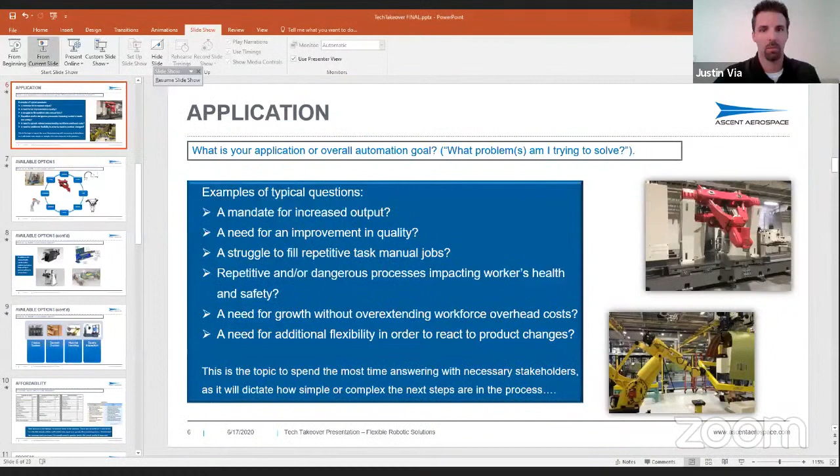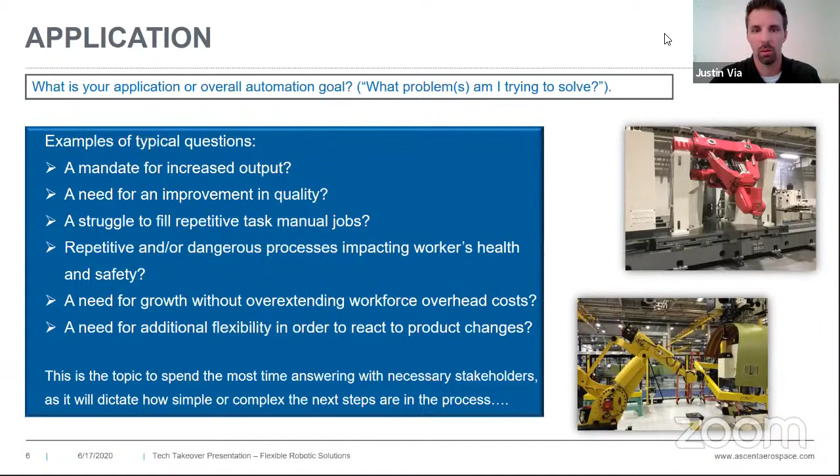How's that? Let's see here. You got it. Is it working now? Yep, it's all good now. Perfect. All right, good deal. Sorry about that.

All right, so the next part here is specific questions that you as a team might encounter related to the application and the problems. Maybe there's a mandate to increase output. There's a need for an improvement in quality. Maybe the team is struggling to find someone to fill those repetitive, manual type jobs, or

there's an element of danger in terms of process where workers' health and safety needs to be evaluated and potentially addressed. Growth without overextending the workforce, or being able to react to fast-changing products. Some level of variety along the way, and making sure that you capture all of these various answers.

And this is important because this is really the topic where, as a team, you're going to spend the majority of your time. The better you outline this and answer these questions, the easier the process is going to be to get through the next steps, because then it becomes much more direct in terms of the solution that you're trying to achieve, the budget that you're going to need to get approved, and then the implementation process for making it happen.

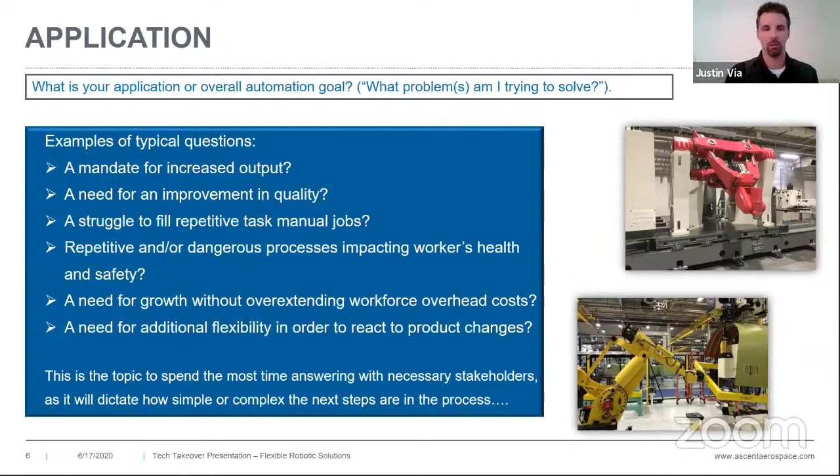And obviously, as we all know, when you're trying to sell stuff like this, the more well-rounded that case can be when you take it to the management team, the faster you will be able to get an answer to that specific budget and question, and be able to move on to the next steps.

So once you get past that gate, that gauntlet of discussion, then you get into the part of, okay, now that I know what problem or problems I'm trying to solve, what are my options? And this is the part where it starts to get a little bit overwhelming, because you're going to get hit with a lot of different options when you dive into the Google searches, and you're going to find words like industrial, SCARA, Delta, medical, service, articulated, collaborative, gantry, and you're going to say, what does all of

this mean? Well, here's a few pictures that give you a little bit of an overview of exactly what you would find as you start working your way through the solution. You have things that are gantry and industrial, which are definitely your heavy hitters, your big pieces of equipment that are kind of a move and get out of the way and let me do the job because of the environment or the processes that you're asking them to take care of.

Or you can have things along the lines of a SCARA or a Delta, or even an articulated and collaborative robot where you're actually working in close proximity to people. Maybe you have technicians around the area, and you need to make sure that the technology matches the safety for the environment and yet still gives you the solution that you're looking for.

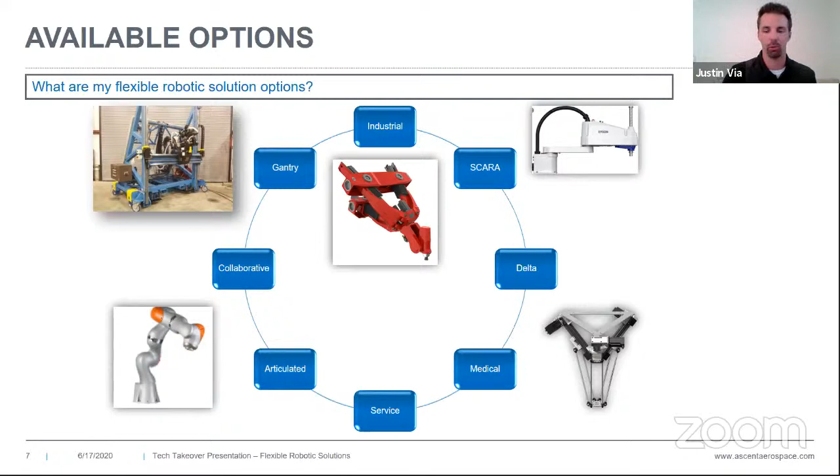But at least knowing the full range of the options allows you to investigate each one of these and really pick what matters to you most from a solution standpoint. Expanding on that a little bit further, in addition to the various options for the robotic motion, you have a variety of process options to choose from, right?

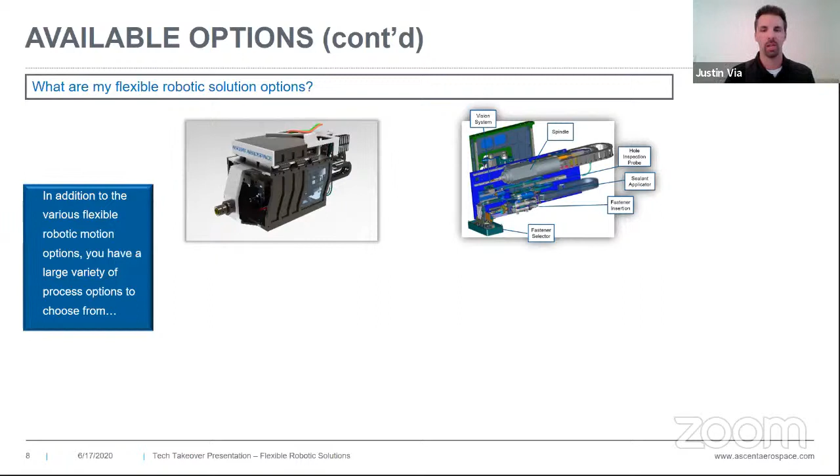Maybe you're looking for a single small compact end effector or process head that just drills holes all day long, and that's exactly what you need it to do, because that's what gives you the best quality and return on investment. Or maybe you need something that is a little more complicated and has multi-function capabilities, because you have a series of processes that you need to address, but you don't have a lot of room for multiple stations, so you try to keep it as consolidated as possible.

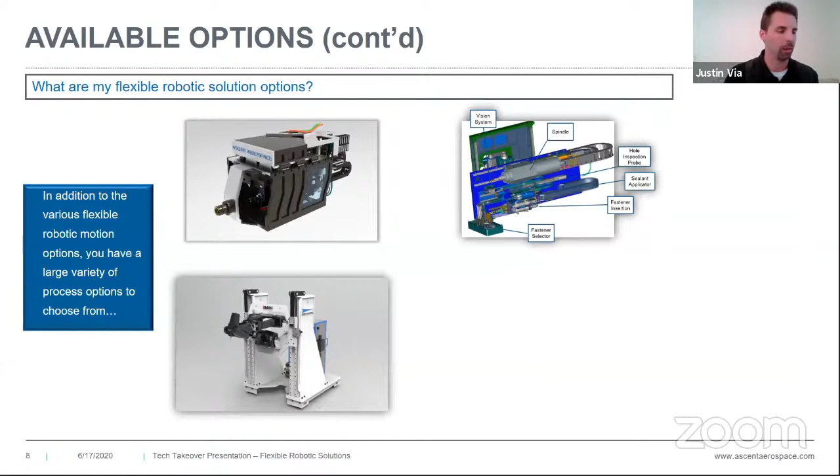Maybe you have an application that requires not only mobile flexibility to move around the different parts of the plant, but you also need a solution that can do drilling as well as machining. So like what you see here, a parallel kinematic machine on a mobile platform is best suited for your application, because it gives you some flexibility plus the necessary horsepower to address your different process needs. Or maybe you just need an entire station's worth of equipment.

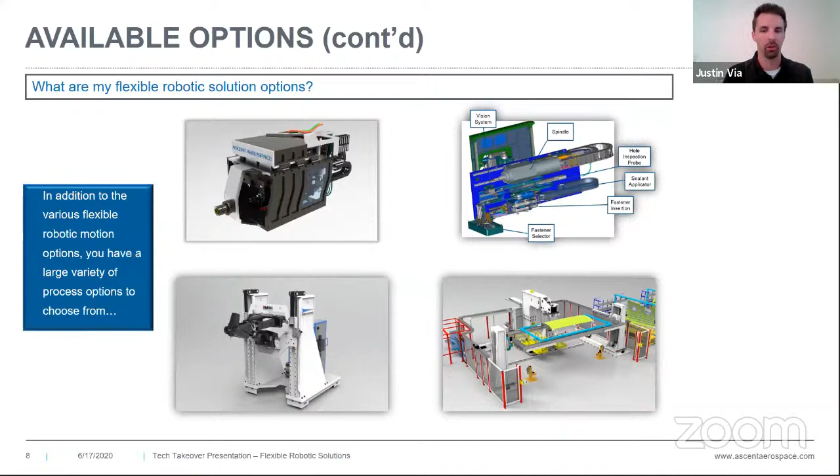You've got things that are big and heavy and hard to move, so by loading your specific parts into a station, then you let the rest of the automation do all of the moves and manipulation, as well as the processes such as drilling and fastener installation, in order to complete the work, complete the subassembly, and then allow for one overhead crane move to move the piece out of the station and move on to the next step in the overall process.

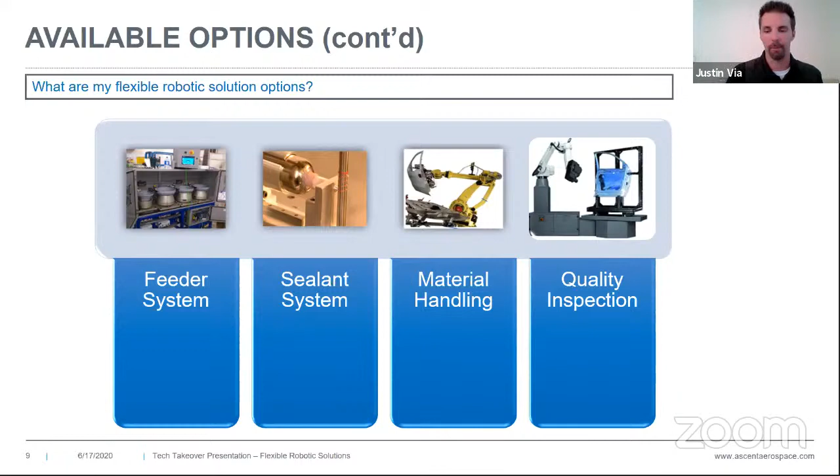Or maybe you just want to have something that is better than your everyday 9 to 5 inspection from a quality standpoint. Something that can learn as it goes, as well as improve the overall spotting of any defects, and make sure that your output to your customer is as reliable as possible, and being able to address those items ahead of delivery and having to take those items back as you go through day-to-day operations.

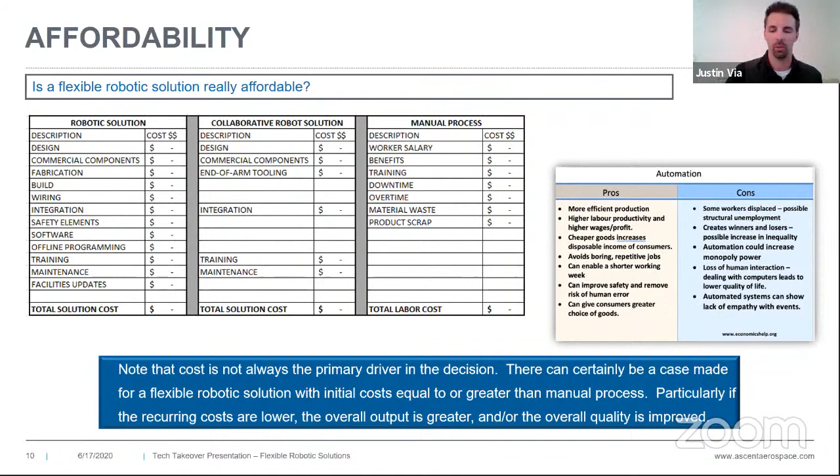But cost is not always the primary driver in a decision like this. There can be very much a case made more often than not that this type of flexible solution, even though its initial costs are equal to or greater than your manual processes, if the recurring costs generated are lower, your overall output is greater and the quality is improved, there's still a very good selling point here. And the more detail that you can provide for exactly what's all been accounted for, yes, it's affordable, yes, this feeds into the consideration for your return on investment, this gives you your best leg up when pitching these types of ideas to your management team.

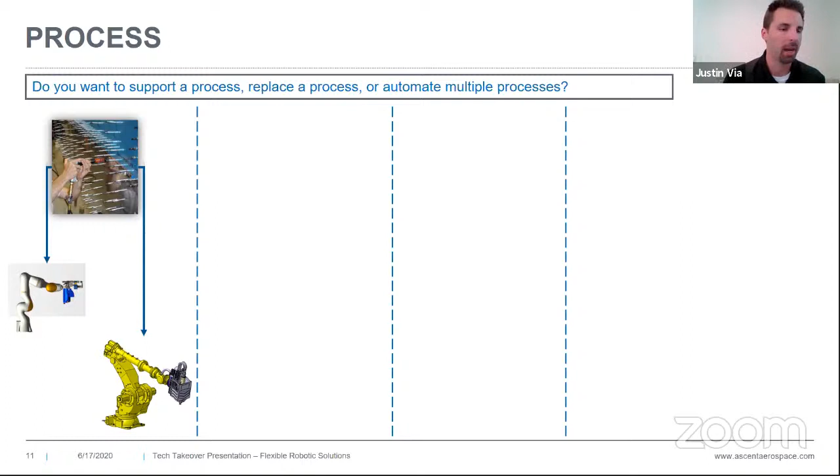So now we'll take a half step into processes here, because overall, you're not always looking for something to do everything for you in terms of your solution. Sometimes you're looking for something along these lines where you have a person that is installing rivets in the side of an airframe and does it for many hours a day, and it's a high impact. So there's a lot of difficulties and challenges that come with doing this level of repetitive work. So maybe you have a robotic solution that's a little bit smaller that can work alongside the worker, or you've got the heavy-duty robotic drilling solution that just does all of it in a single process.

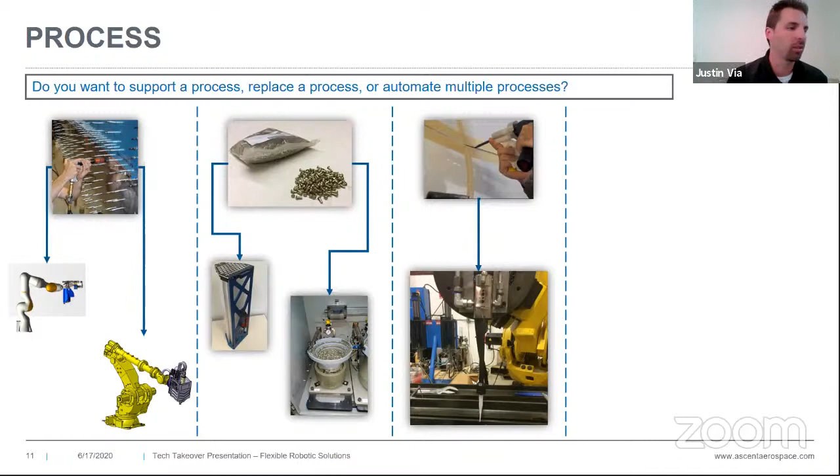Sealant is another tricky one in the industry. Doing sealant by hand is still a thing. It's still a method. Not everything from a sealant application can be automated. Challenges of the different styles of sealant, specifically aircraft sealant, have quite a few challenges from a shelf life standpoint. So there's usually a need to do it by hand. But if you could find a way to pair it with a robotic solution, then you give that chance of overall quality improvement and ideally a cycle time improvement as well, which would help your overall manufacturing process.

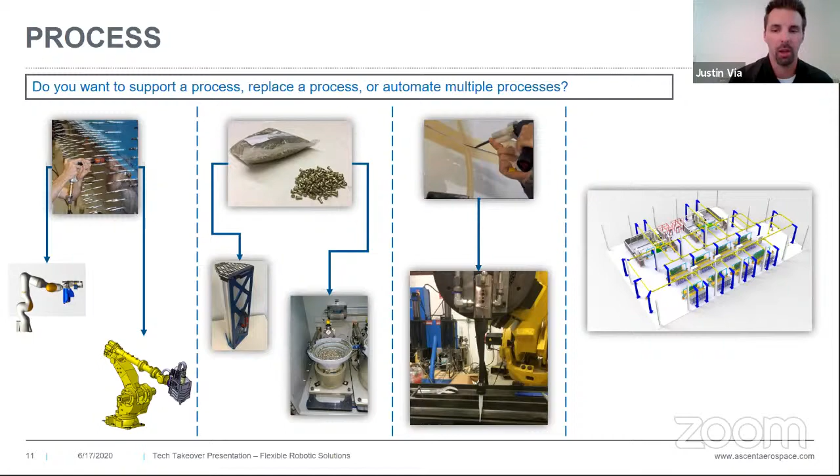And then maybe here you have multiple processes that you're trying to automate, and you got a little bit more floor space to work with. So something along these lines where you have a series of manual stations within a local overhead gantry system to bring the pre-worked panels into an automation station, let them do some of the work, and then take them to inspection stations. So you have this combination of the manual work along with the automation to support your overall manufacturing processes.

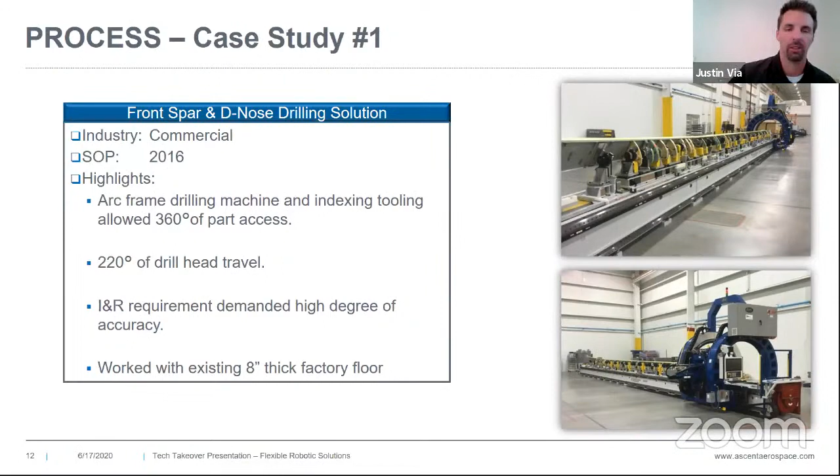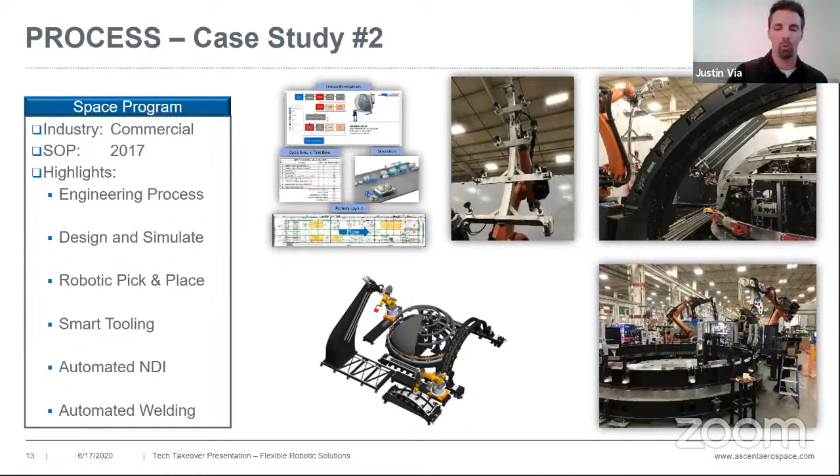So it was a very good collaborative effort, and something very much so that both teams were proud of that they were able to achieve. Moving on to the environment aspect of this, one of the key things is: is it safe? Is it a safe and desirable place for a human to create a high quality product? And unfortunately, we still have areas where that answer is no.

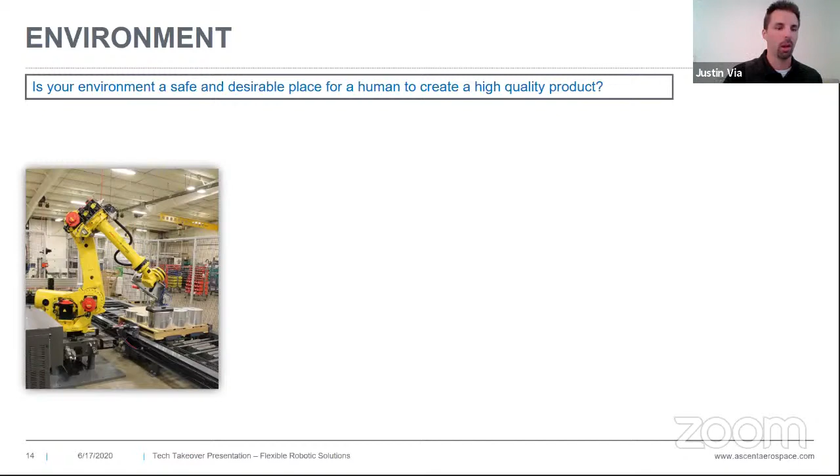In this particular case, you can see here that you've got a robotic solution that's lifting a very heavy billet. Normally it would be done by a person, and not only is it big and heavy, it also doesn't have a lot of good grip surface. So being able to assist in the process by adding a robotic for the material handling aspect was definitely the right way to go in terms of their manufacturing process and their solutions.

Welding, especially welding of cars, car structures, is a very dense, heavy workload, very high cycle time, very high demand. So doing something like this manually in order to produce the right level of automobiles for supply and demand is not good. It's not the right place. So being able to work through these challenges and apply automation in this respect gives each OEM the advantage of maintaining the rate while keeping workers safe and out of harm's way in the heavy work area of the environment.

And then the last one here, just to kind of touch on it, this is a very tall final assembly structure for a wing assembly. Now, traditionally, you would have 20 workers on various levels of platforms and gantry and scaffolding, drilling thousands of holes all day long, climbing over each other as well as climbing onto the product. And it wasn't a sustainable way for them to maintain the rate for the product that they needed to provide to their aircraft manufacturer.

So being able to add a tall gantry drilling system allowed them to bring back the operators, train them more into how to use the equipment, and focus on the quality and the inspection of the final product, making it a more collaborative effort in that respect.

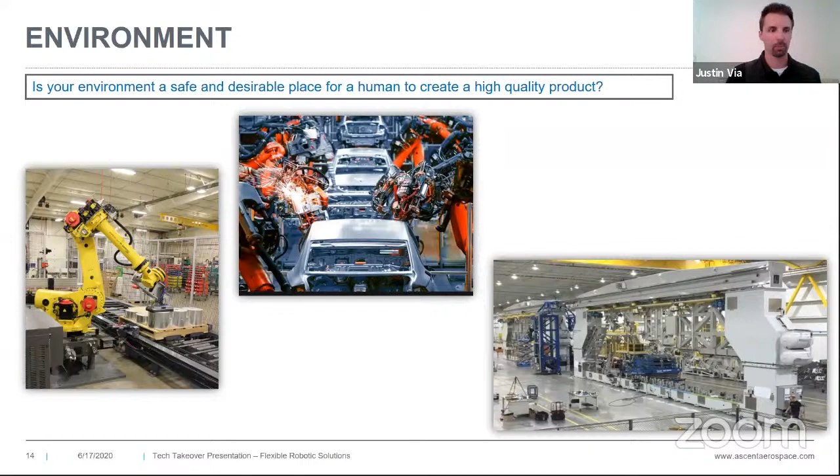One more case study here real quick. We had an opportunity to do a wing skin lift and rollover fixture back in 2017. You can see from the details, it was 85 feet by 150 feet. This was a very long wing skin structure, and it had multiple variations, 8 different panel configurations, and it needed to go from a horizontal condition and be raised up into a vertical condition.

Traditionally, this was done by overhead cranes, multiple people with taglines trying to hold on to this wing skin and make sure that it did not move in a way that would be unsafe. It was a very stressful, very cumbersome process that slowed them down considerably.

So they came to us with the idea of being able to do this in an automated fashion, and despite the size of it, it was a very successful project in being able to load the different variants of skin panel as well as raise and lower while keeping everybody a safe distance away from the product. So taking environment things like this into consideration certainly is paramount in what type of solution you're looking for.

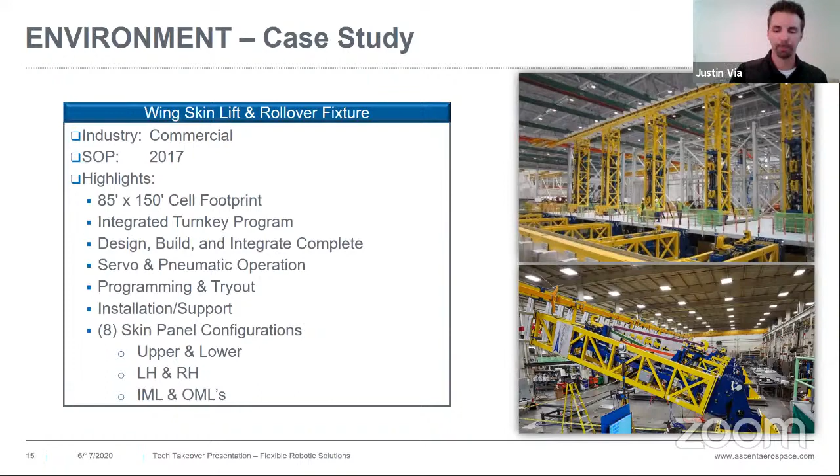Now, space allocation. Again, a lot of what we just went through, you saw a lot of big examples, right? So your available footprint can play a significant role when identifying the solution in terms of both your flexibility and or your complexity, especially in environments where you have operators working right alongside the equipment. So in one example, maybe you have very small aisleways. You can't necessarily take up a lot of space all of the time. You have to be flexible.

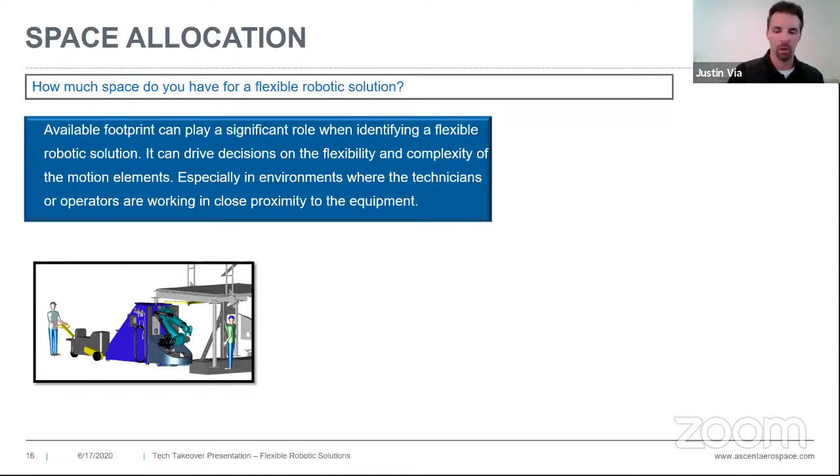So something like a mobile robotic platform with a tug to drive the automation to its respective location, dock it and allow it to do work, and then take it from station to station in this manner. Maybe this is the way that you are able to bring the solution to your manufacturing environment.

Or maybe you have the room available for some dedicated cells, and you can set it up so that your parts stay static, and you put the robotic solution on a 7th axis slide so that it can traverse from one end to the other. That way you don't have to worry about moving your engineering product. Let the automation do all of the motion and moving around.

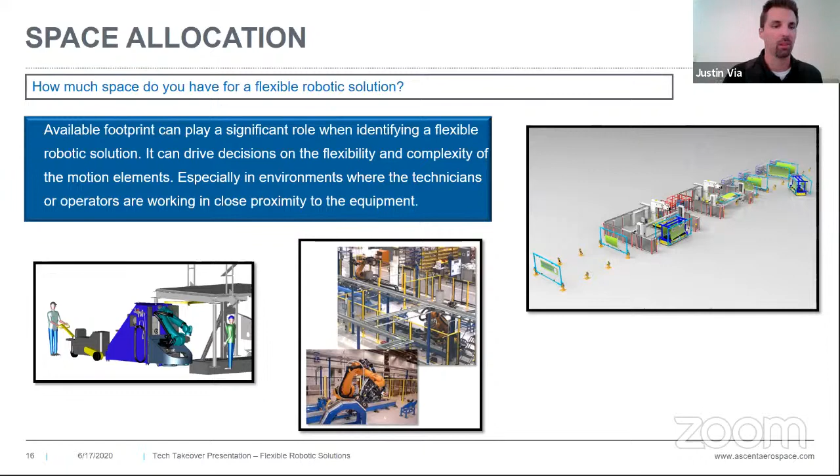Or maybe you've got a much larger footprint and a need for not only AGVs bringing products to an automated station, but also some areas for staging as well as inspection. So you've got a little bit more liberty on your floor space. And again, obviously cost goes into this as well, but at least if you have the footprint or maybe you have a green field, you can definitely make use of the overall space and design it the way that you want versus trying to maybe shoehorn it into a different area in terms of your space allocation.

And then finally, a few other factors that might not come to mind immediately are sometimes you have to play within the existing foundation. You have a certain quality, and you're not able to make any updates to the foundation. You have to deal with whatever the thickness of the concrete or reinforcements. Maybe you have crane and building height restrictions, or you can't use overhead cranes at all, or they're traversing over the top of your automation, so you have to be aware of what is coming in and going out of that environment. And then in some instances, you also have seismic conditions that you need to account for, depending on where in the world you are implementing this automation.

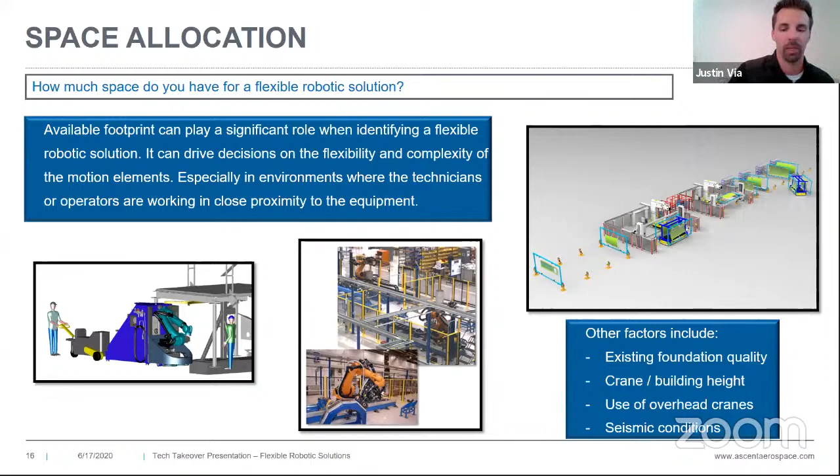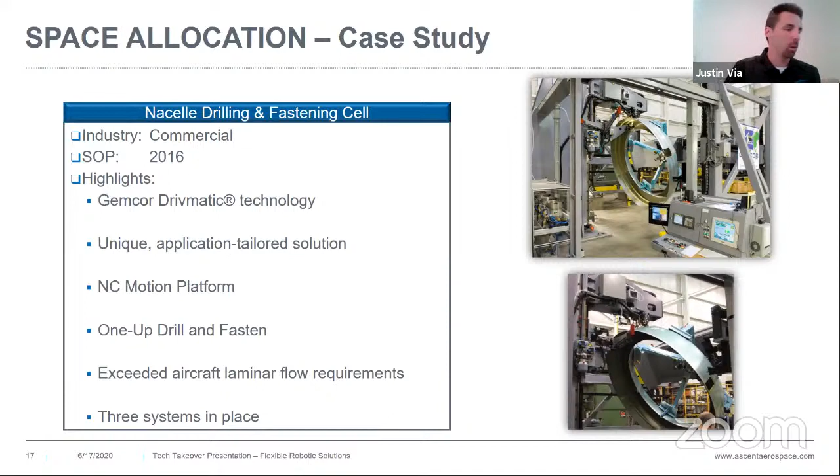And saved so much that shortly thereafter, they were asked to implement 2 additional systems in the exact same plant, because the manufacturer was in fact able to achieve a higher overall rate and meet a greater need by adding two additional systems into the plant. In the end, they ended up probably consuming the same amount of space as all of the manual work, but the amount of rate that they were able to get was significantly higher than the overall manual process that they originally had.

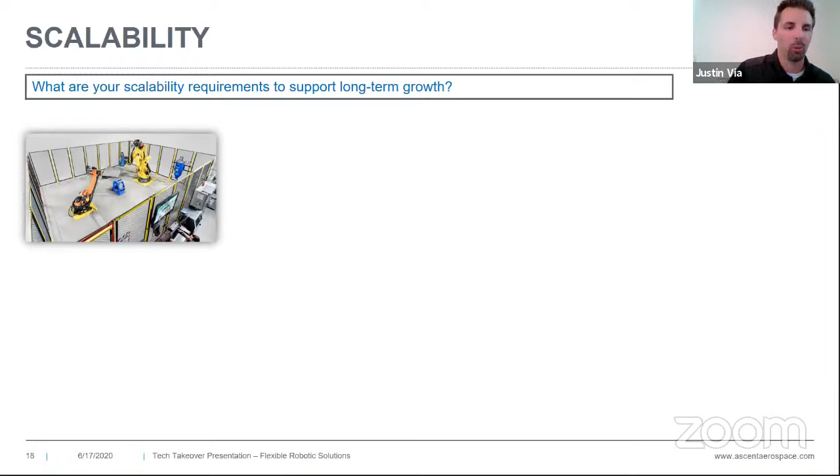The next tier is scalability. Being able to understand what you need to do immediately and what you need to do for your overall long-term growth. Maybe you have an opportunity to set up a cell that has a little bit more floor space allocated to it. Doesn't necessarily look like you're taking all of the space when you first start using it, but then you have that flexibility to bring in some larger products or more diverse products, which again would improve your overall percentage of use on your automation and improve the overall return on investment.

Or maybe you have a mobile robot platform with a need for exchanging end effectors. So you use ATI coupling style technology in order to hand off different end effectors. That way the platform stays the same, but can be moved to different parts of the process and execute different styles of work by doing that kind of a handoff.

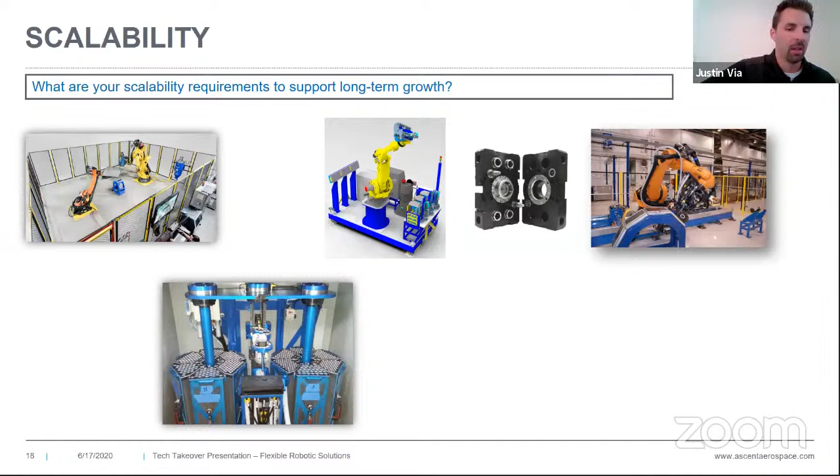Maybe you're trying to allow for a fastener feed system that can send over a specific variety of fasteners, and then a year or two later the fasteners change, processes change, requirements change, but being able to exchange only the cassettes would mean that you don't have to change anything from your overall floor space that you've taken up. You just have to improve the variety of the cassettes that you bring into the fastener feed station, which gives you an even more flexible mix of what this feed system can provide for you without having to change anything up. You just have to add an update to the equipment.

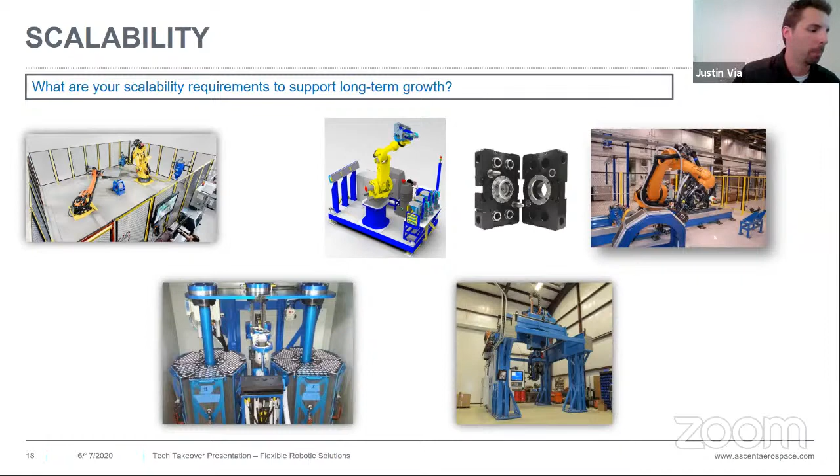Or maybe you have more of a large one-size-fits-all. I want to roll in a bunch of different types of parts, so I want maximum gantry reach and flexibility in order to not only process multiple pieces, but also multiple sizes of those pieces. So you give yourself a little bit more room. You fight for that floor space because again, you know that you're going to be able to bring in large and small elements and have the machine work on them all the same with very few changes and certainly no change to the footprint that you've already accounted for.

to do the fastener installation. What we ended up being able to do for them is provide the robot and the material handling element, so these various frames that could hold on to the different styles of the fan cowl, essentially replacing four semi-automated cells with just one fully automated cell. And I guess the biggest selling point for this one was the return on investment was under a year. It originally had a two-year estimate, and based on how quickly and how well everything went, it ended up showing its return on investment much sooner from an overall success story standpoint.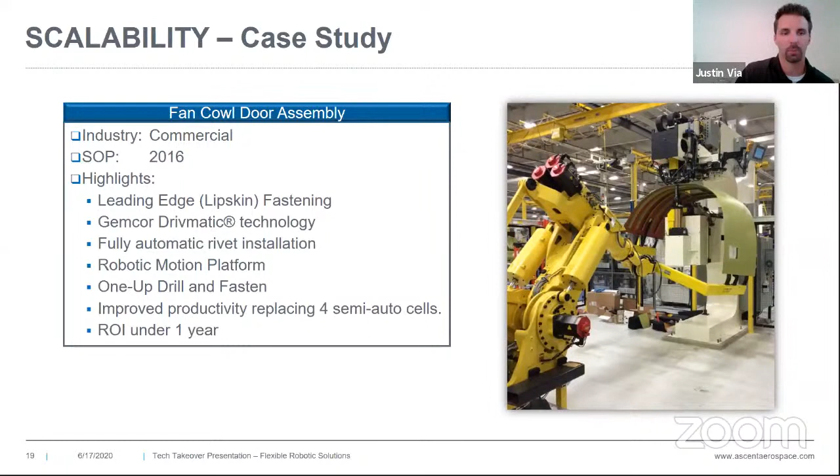And then finally, you get down to payload, reach, and accuracy. So again, from the earlier part of the presentation, this is more of the real detail, the nuts and bolts of what goes into coming up with these types of solutions. Once you've identified all of the other items through application, through process, through space allocation, and the scalability that you're also trying to get to, now you actually get to start picking the specific pieces of the automation that are going to give you that best return on investment, right?

So then you start taking things like, what is my payload? If I'm trying to move something, how heavy is that something? But more importantly, how heavy is the element that's also needed to move it around. Sometimes a robot's not the right solution because whatever you're trying to move is too heavy for that consideration. So maybe it's more of a local gantry system versus an overhead crane, or an AGV if you want to be able to move it around on the floor instead of having elevated moves throughout your plant.

The number of axes that you need in order to achieve your motion. Not everything is a robot. Not everything requires six axes of motion. Sometimes you can get away with a single motion application if it's simple and repetitive, and it's just cumbersome and fatigue related for someone to do it by hand. So make sure that you account for all of those axes of motion and really identify what you need.

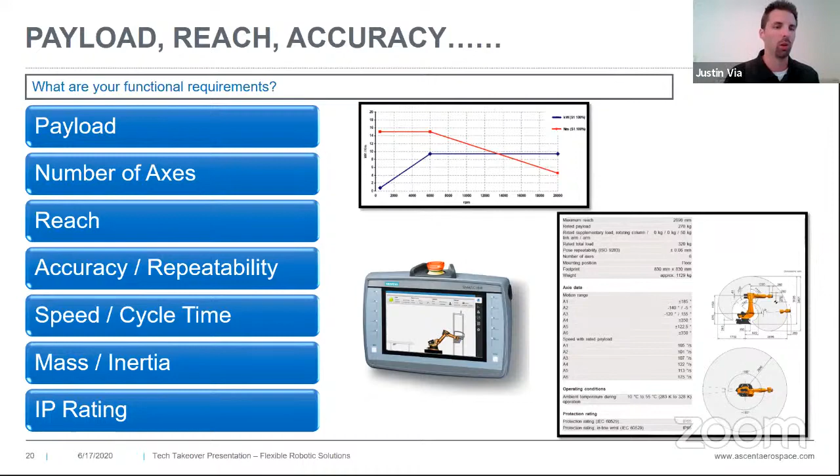So they're not always easy questions to answer, but if you really spend the time and go through the exercise and map out as much of this as possible, you really will come up with the overall solution that you're looking for in the end.

And lastly here, the various methods for robotic solution selection. So the first thing that you're going to come across when you're looking into this nowadays, with the way that technology is and subject matter experts and the like, you've got online calculators. You've got a lot of different information available to you at your fingertips by doing your own research. And before, you'd have to go to the library and map out a lot of different things and make mistakes on calculations, and you weren't sure. Whereas now you've got checks and balances for online calculators. But again, you're still working at it on your own and kind of more in a vacuum.

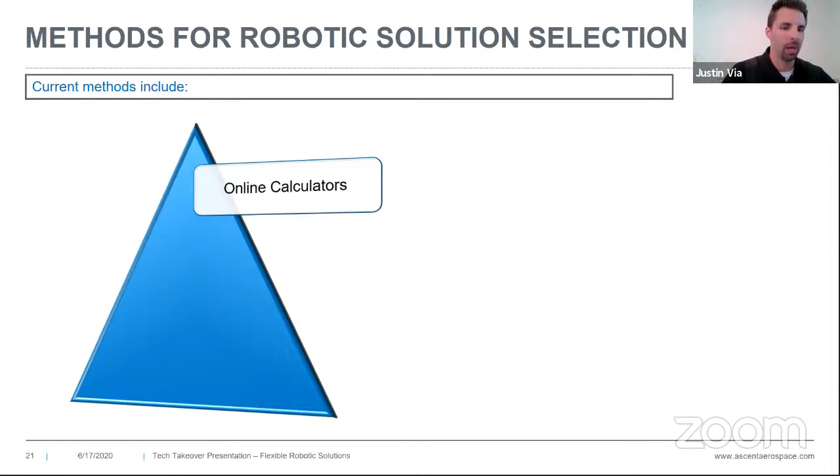So when you get to that part, then you rely on internal technical teams to help guide the process as well, or application engineers, people that size these components every day of the week. So working in cooperation with them, they can certainly point you in the direction after you describe what your process is, and they can look at what you've come up with so far, and then direct you if that is in fact the most reliable or best fitting product, or if there's a recommendation for something different based on what they've seen and calculations they've run and similar instances in that respect.

And then finally, you have collaborative partnerships with integration companies. This is the part where you don't necessarily have full control anymore, because now you're relying on a third-party group to come in and work alongside of you. But keep in mind that these are the companies that do this stuff all day long for multiple customers across multiple industries. They have a lot of different ideas. They've been able to work with customers to solve the same problem with multiple ways of a solution. There's an opportunity there to get more of that library of information without spending a lot of time having to do all of that research yourself.

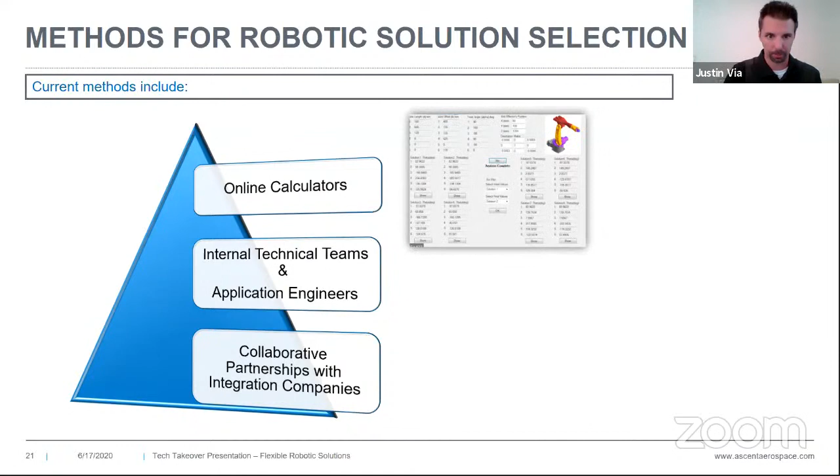But again, it has to be a collaborative partnership. It has to be that vested interest in terms of what you need to get to that success, and working with and trusting their overall knowledge of the industry in order to get there in the first place. And obviously without the trust, it's not going to be a very good relationship overall. But certainly one that has proven the test of time, up to this point.